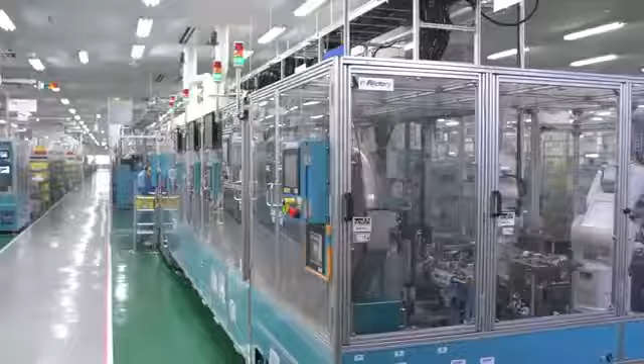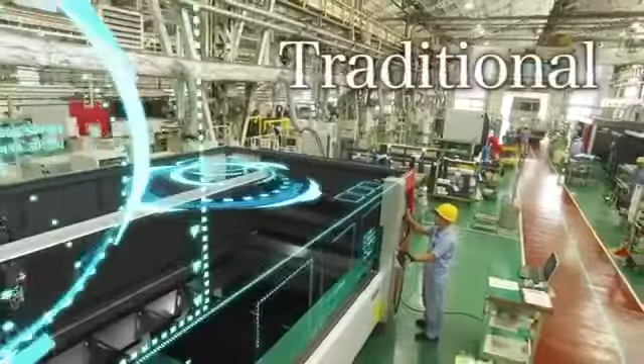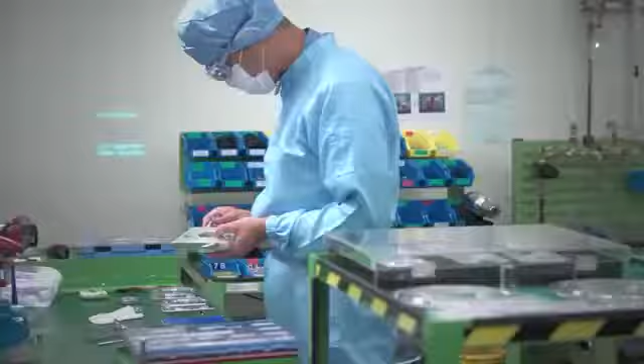Inherited from its long history of manufacturing expertise, with advanced technologies creating trust and traditional skills maintaining high quality. Continuously taking on challenges while moving forward with innovation, Mitsubishi Electric Nagoya Works is constantly pursuing its goal of being an advanced and global manufacturer.

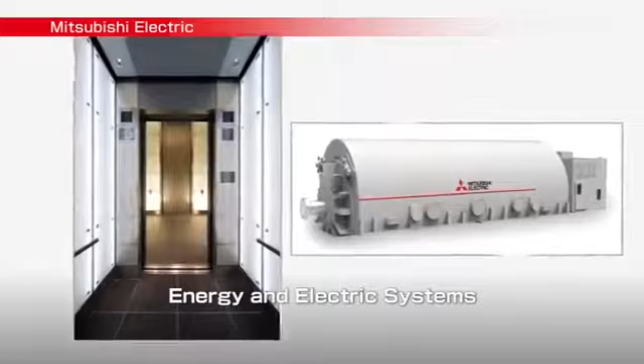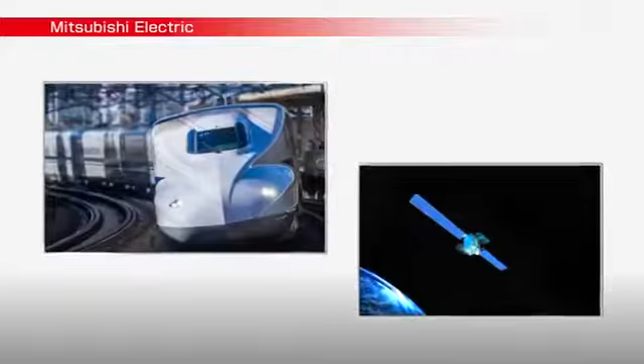With its company slogan of Changes for the Better, Mitsubishi Electric is continuously evolving, involved in a diverse range of business segments, aiming to become a global and leading green company.

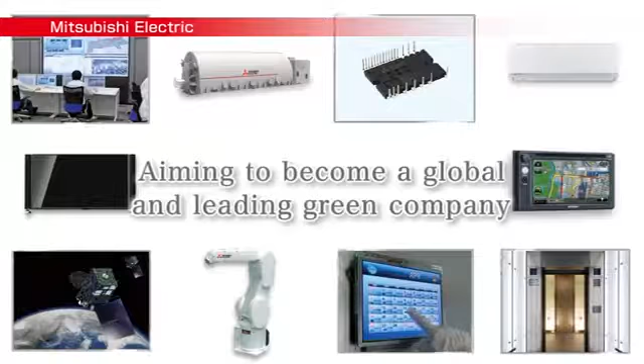Years after the establishment of Mitsubishi Electric in 1921, Nagoya Works began operations in 1924 with the mass production of general-purpose electric motors.

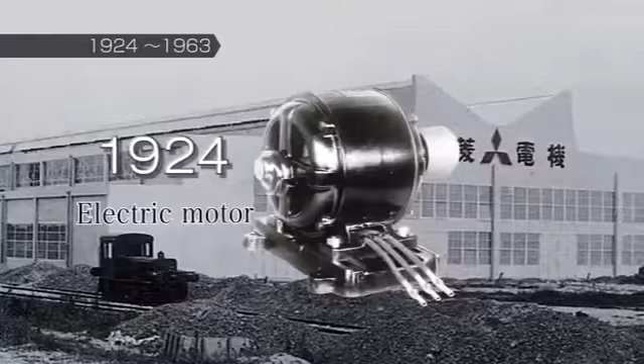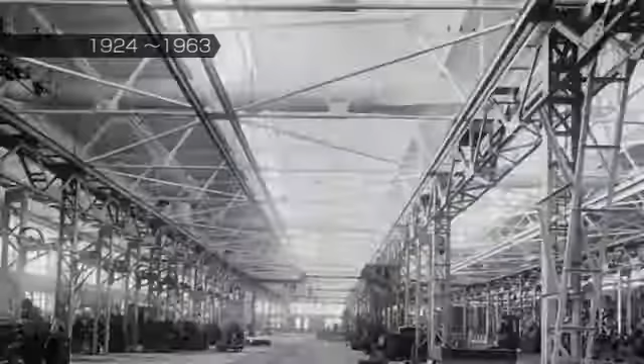Utilizing its experience of manufacturing electric motors, it began manufacturing home appliances. This extensive know-how was then passed on to other factories, with Nagoya Works becoming the mother factory, contributing to the overall development of Mitsubishi Electric.

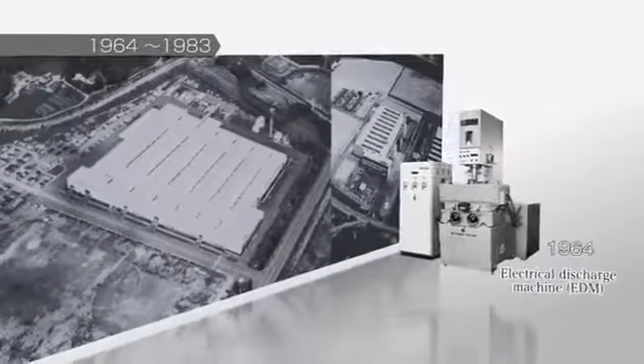To satisfy the requirements of the manufacturing industry at that time, production started on various factory automation and mechatronic products, resulting in innovative and groundbreaking products time after time.

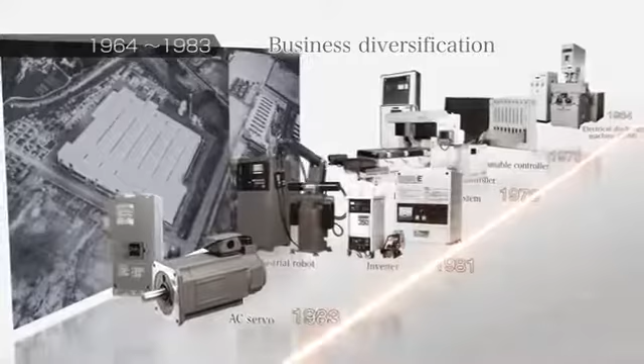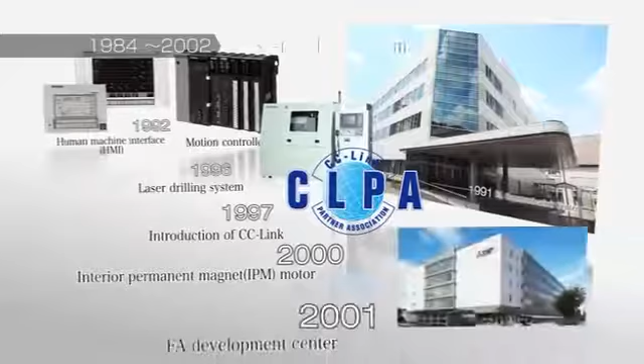As demand diversified, the core foundation was further strengthened in production, quality, and sales. Establishing a strong overseas support network, Nagoya Works became a leading manufacturer of factory automation products.

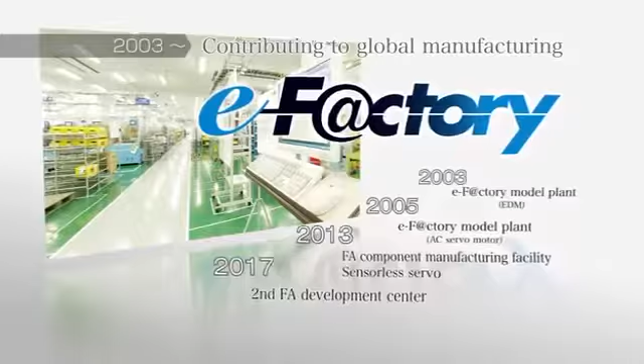In 2003, the e-F@ctory model plant started operations, realizing next-generation manufacturing techniques and contributing to global manufacturing by using its ethos of taking challenges head-on.

Nagoya Works has an extensive manufacturing network with production sites both in Japan and overseas. These include the Shinshiro and Kani satellite factories in Japan and additional production facilities in China, Thailand, and India.

Optimizing manufacturing operations globally with Nagoya Works at its core.

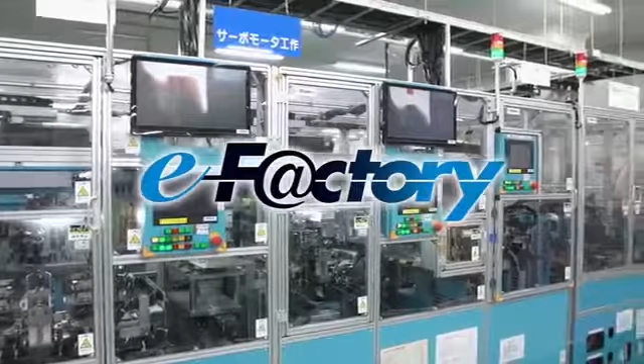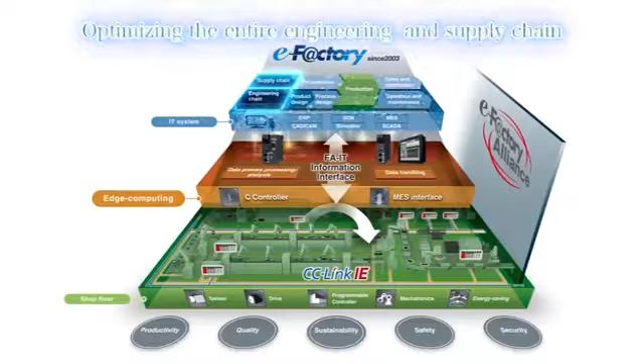The total solution, e-F@ctory, was created by integrating the advanced technologies and extensive know-how of Nagoya Works. By utilizing factory automation and IT technologies, e-F@ctory optimizes not only manufacturing operations, but also the entire engineering and supply chain, realizing advanced manufacturing practices.

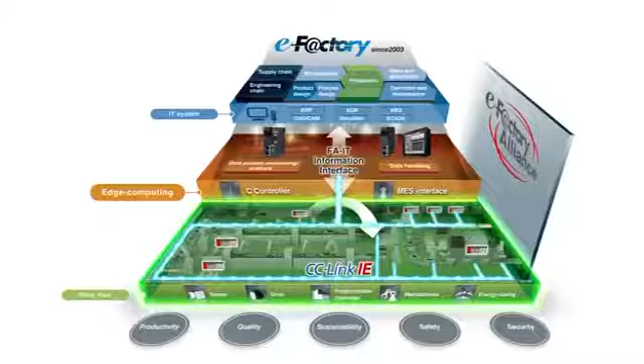E-Factory collects production data in real time. Together with edge computing, this enables primary data processing, seamlessly communicating data to the IT system.

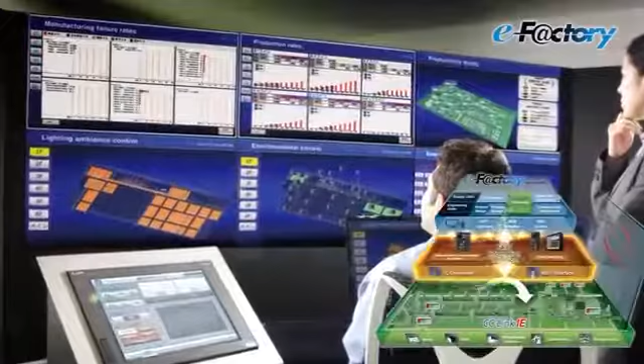With feedback of analytical results within the shop floor operations, such as productivity, quality, energy, safety, and security, E-Factory helps to reduce total costs.

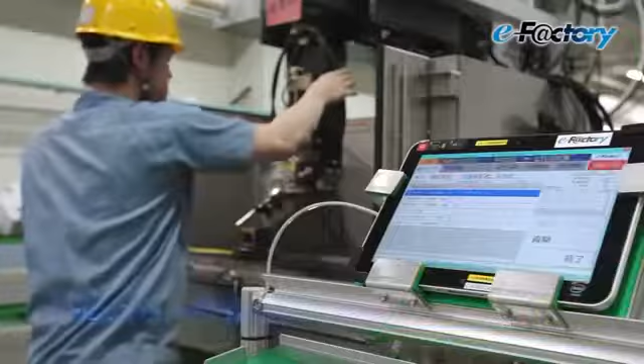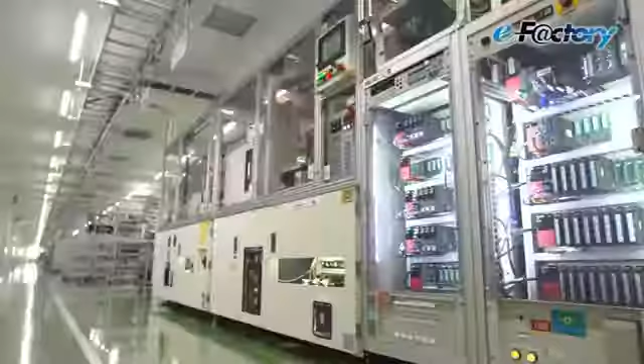A variety of core technologies and solutions were used to realize E-Factory. The iQ Platform realizes maximum return on investment through its integration of the automation controller, network, and engineering environments.

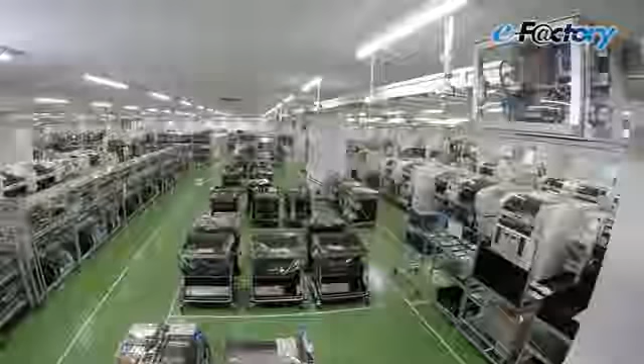CC-Link IE is an Ethernet-based industrial open network, leveraging connectivity between the shop floor and IT systems. It has become a global standard.

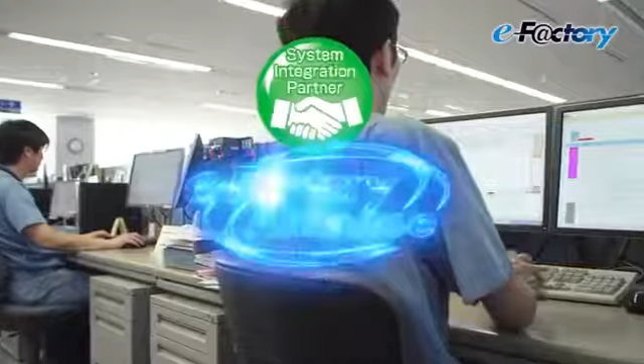Through collaboration with highly specialized E-Factory alliance partners in the fields of system integration, software, and hardware, eFactory solves customers' problems.

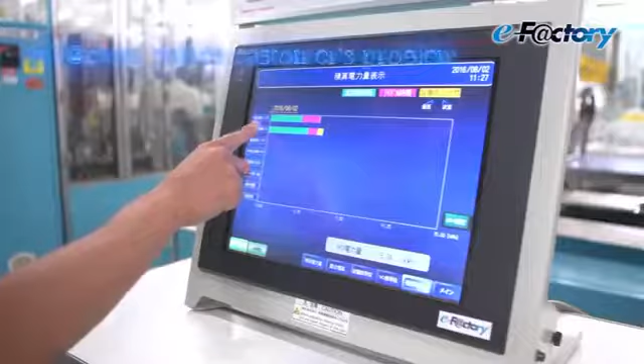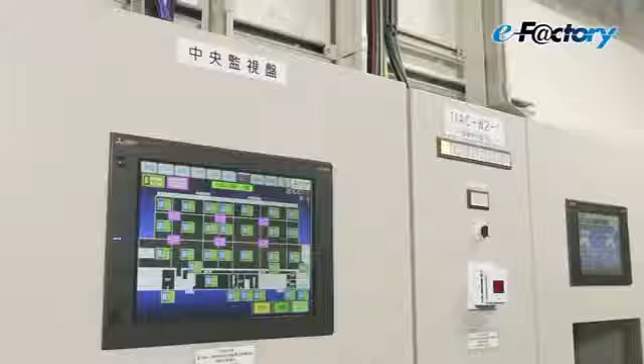When eFactory was applied to the factory automation component manufacturing facility here at Nagoya Works, major improvements in productivity, quality, and energy savings were realized, such as a 50% reduction in loss of quality, a 30% gain in productivity, and a 30% reduction in energy consumption costs.

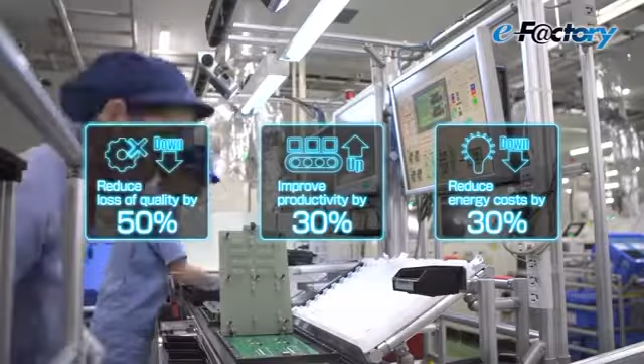This was achieved by the introduction of extensive operations management, task-based support management, and HVAC energy management systems. eFactory has been introduced at other factories in Japan and overseas, adding further value to these facilities.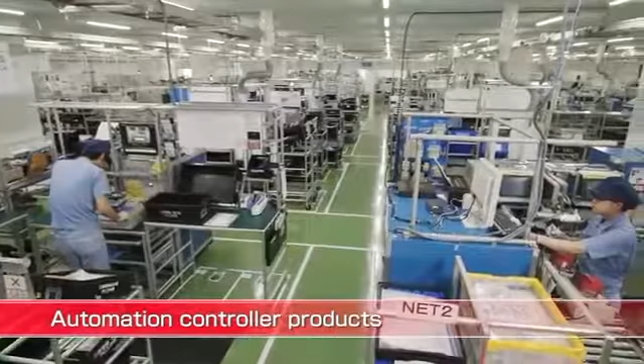Nagoya Works develops and manufactures a wide range of factory automation products, which help to improve productivity and quality. Programmable controllers and HMIs are part of a group of automation controllers realizing high-performance automation.

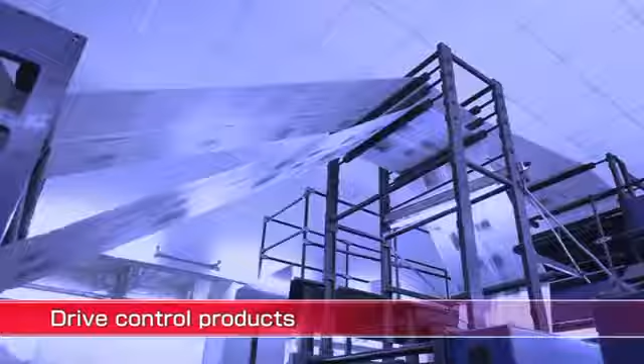Drive control products include computerized numerical controllers, inverters, sensorless servos, AC servos, clutches and tension controllers, three-phase motors and IPM motors, enabling high accuracy and variable positioning control.

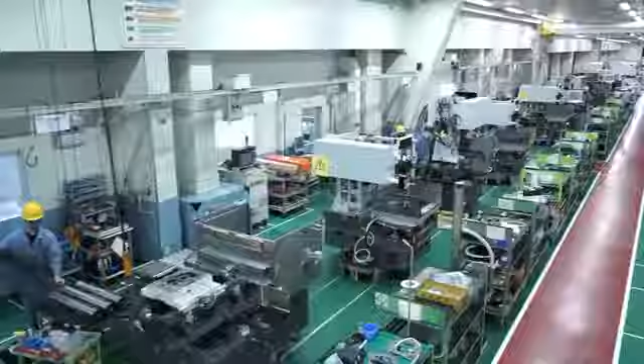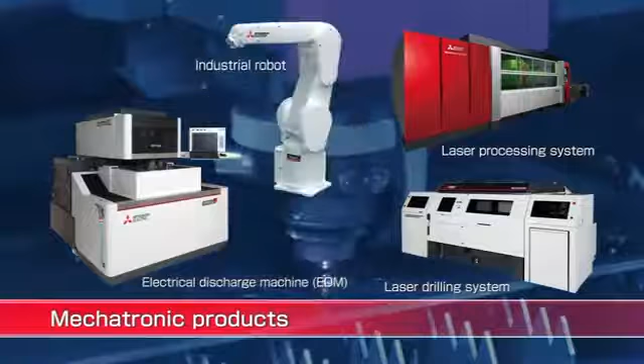Mechatronic products enabling ultra-high speed and precision control include electrical discharge machines or EDMs, laser processing machines, PCB substrate laser drilling machines, and industrial robots.

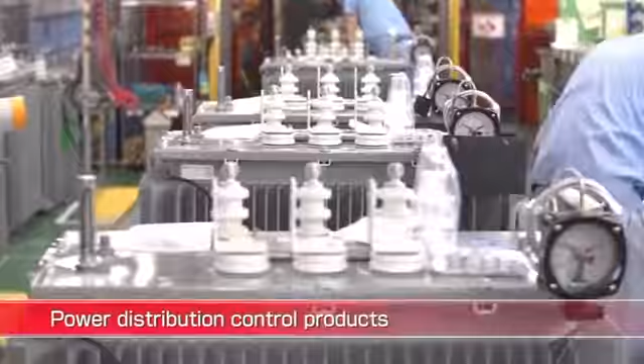Power distribution products such as magnetic motor starters and transformers are used extensively in manufacturing plants and infrastructure.

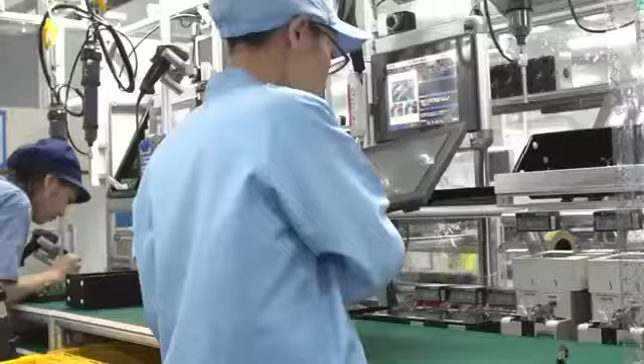Nagoya Works can also provide engineering software to integrate these FA products, and as a total FA supplier, develop and manufacture products that are best fit for the application.

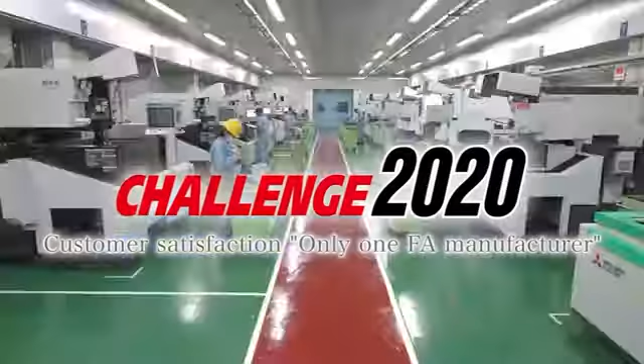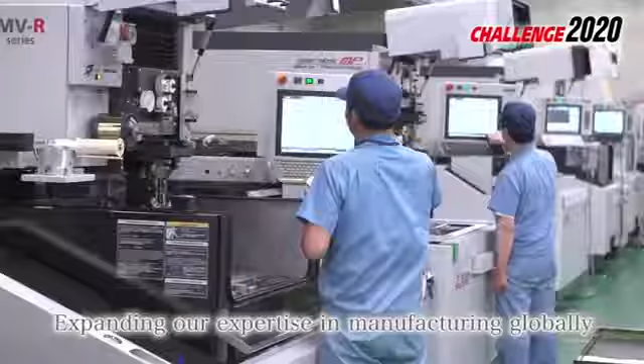Through its Challenge 2020 initiative, Nagoya Works aims to become the only one FA manufacturer in customer satisfaction, optimizing manufacturing systems from development to production, quality, and service, expanding our expertise in manufacturing globally.

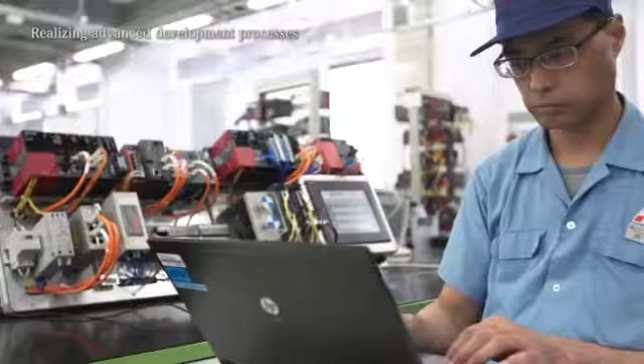Through our extensive research and development resources here at Nagoya Works, within Japan and overseas, we realize advanced development processes from components to total solutions, continuously adding value.

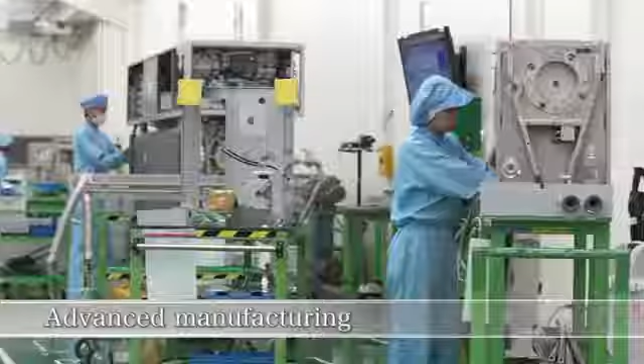Nagoya Works utilizes components with key technologies that have been developed internally, maintaining high quality and adding value to the final product.

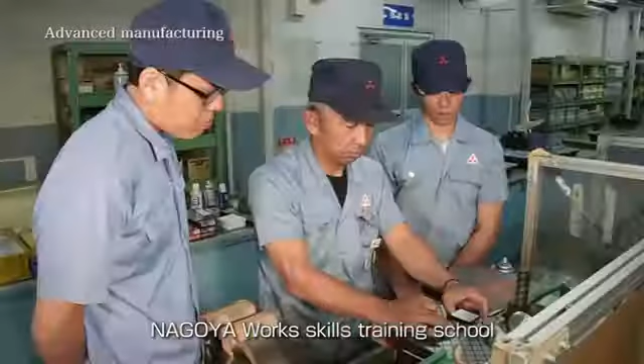Nagoya Works Skills Training Schools give the opportunity for employees to pass on their extensive knowledge and experience.

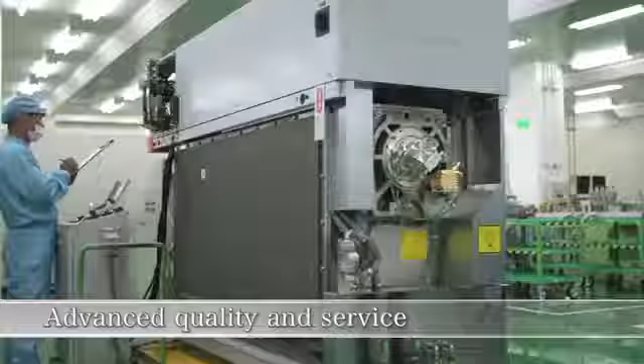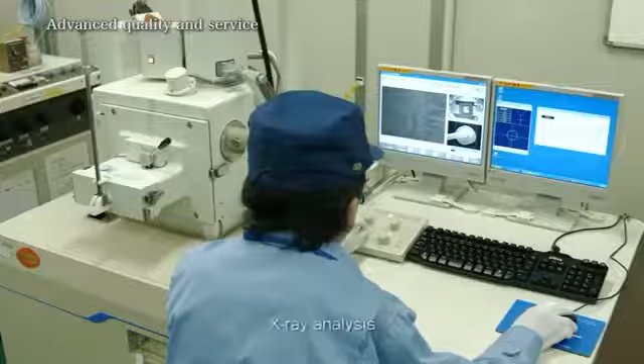High quality is assured by conducting stringent testing in both the development phases and during production, utilizing advanced testing equipment. Striving towards zero defects, maintaining high quality and reliable products.

Mitsubishi Electric boasts an extensive service and support network, spreading its advanced technologies throughout the world. Service centers are being opened globally, helping to construct an extensive global support network offering everything from technical consultation to training and post-sales support.

At Nagoya Works, basketball training sessions are held by the Mitsubishi Electric women's basketball team, who are members of Japan's top league. We support the local community with various activities as a corporate citizen of Nagoya. Mitsubishi Electric is also the official sponsor of the Nagoya Diamond Dolphins basketball team.

Nagoya Works has forged a path in history as a mother factory. From here to the world. Producing, adding value, contributing to the blueprint of future manufacturing. This is our spirit handed down from one generation to another.

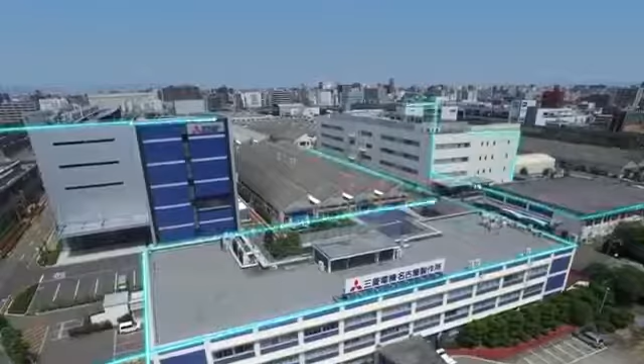Continuing to be the right partner for our customers. Innovating. Challenging.